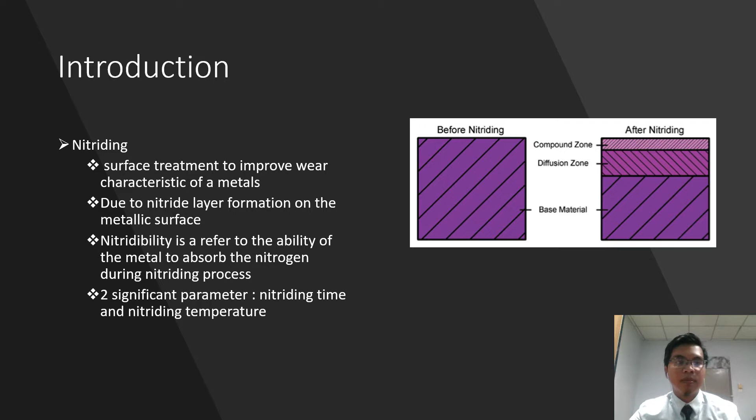There are three nitriding methods which are commonly used nowadays. Those three methods are gas nitriding, salt bath nitriding, and ion plasma nitriding, which is also known as ion bombardment nitriding. All these methods fall under the category of thermochemical processes of hardening the metal surface. However, the most suitable method for nitriding a magnesium alloy is gas nitriding.

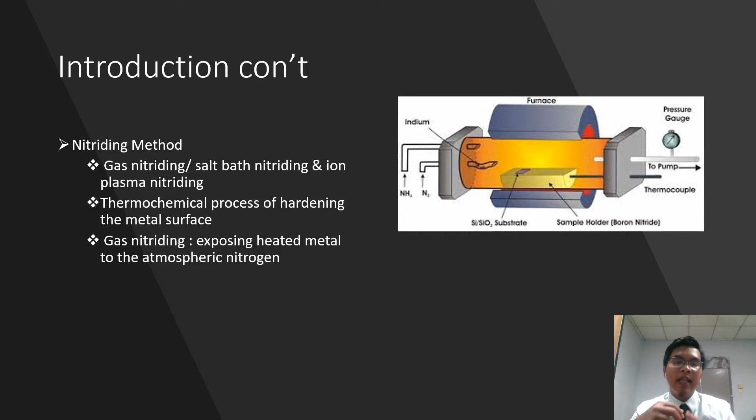Salt bath nitriding and ion plasma nitriding are not suitable because of the nitriding temperature. They require a higher nitriding temperature exceeding the melting point of a magnesium alloy. Therefore, the magnesium alloy will burn before the nitriding process ever occurs. So gas nitriding basically is exposing the heated metal to atmospheric nitrogen.

Magnesium alloy has been introduced into a variety of applications and fields such as automotive industries, electronics, and telecommunication. Magnesium alloy is also known for its excellent strength to weight ratio, where it is a lightweight metal but with higher strength.

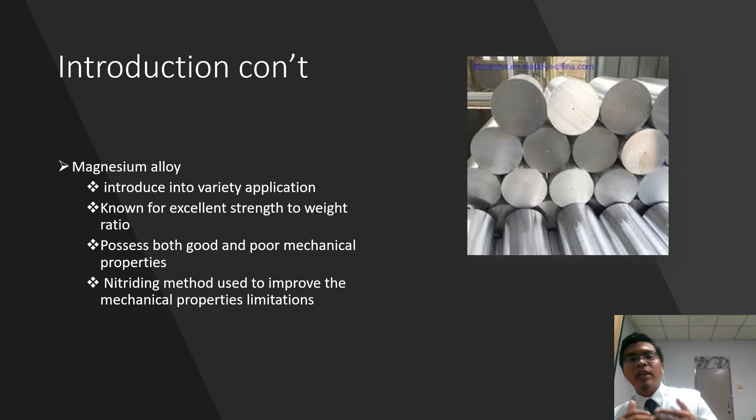It also possesses both good and poor mechanical properties. In terms of good properties, it has high dimensional stability, good machinability, good fatigue strength, excellent biocompatibility, and also a low density. However, in terms of poor properties, it has low surface hardness, low melting point, and low corrosion resistance. Therefore, a nitriding process is proposed to help improve the mechanical property limitations of the magnesium alloy.

The problem statement of the project is that magnesium alloy is a popular metal which has been introduced into industries. However, little study has been made on nitriding magnesium alloy, where most nitriding studies were made on carbon steel or titanium. Therefore, the best parameter setting for nitriding a magnesium alloy remains unknown.

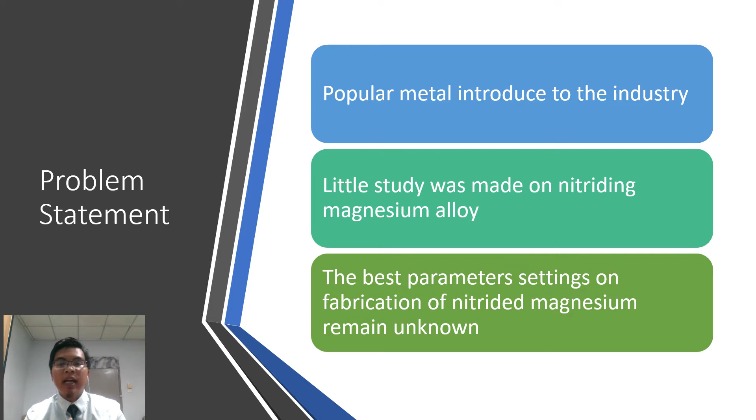Therefore, the objective of the project is to establish the correlation of the nitrided layer formation on the magnesium alloy with respect to the nitriding time. So here is the methodology of the project, which consists of dimensioning the sample, nitriding process, sample preparation, scanning electron microscope SEM imaging, X-ray diffractometer powder diffraction, and also hardness test.

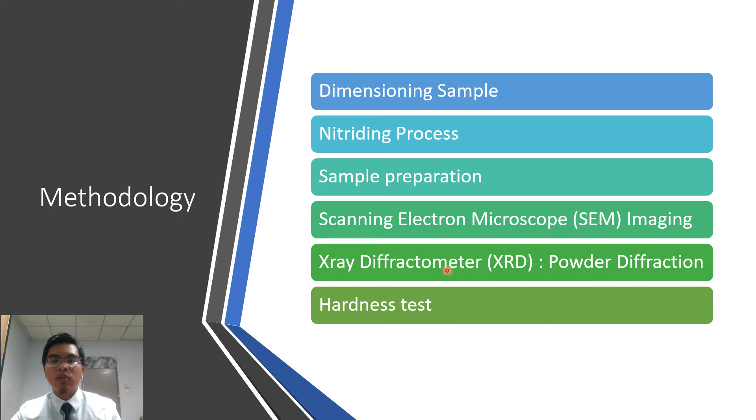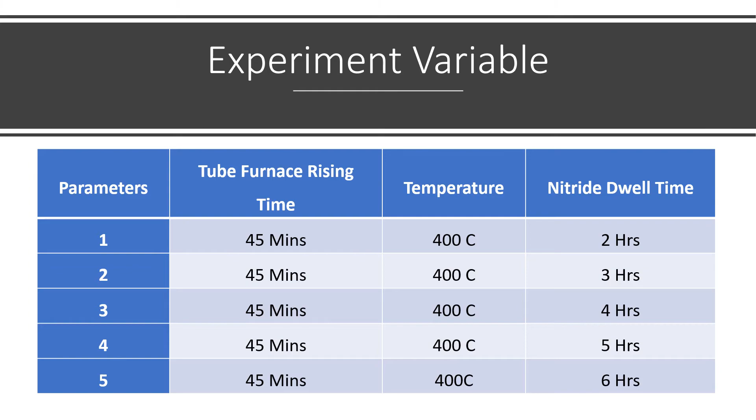Here are the 5 parameters used during the nitriding process. Every sample will have the same tube furnace rising time of 45 minutes at a constant temperature of 400. The difference for every sample is the nitriding dwell time, or the nitriding time, from 2 hours, 3 hours, 4 hours, 5 hours, and 6 hours. The results of the project will consist of microstructure, SEM imaging, XRD, and hardness test.

Here are the images of the microstructure for every sample. For the untreated sample, there is no layer formation between the phenolic powder and the magnesium itself. However, for the 2 hour and 3 hour nitriding, there is a visible layer between the phenolic powder and the magnesium, which occurs in this area for 2 hours and this area for 3 hours.

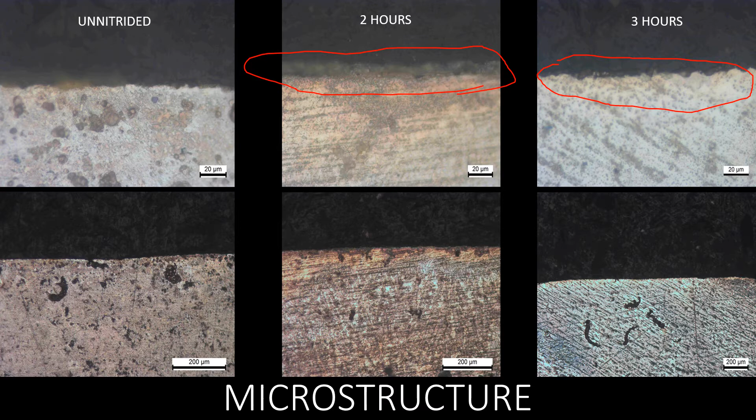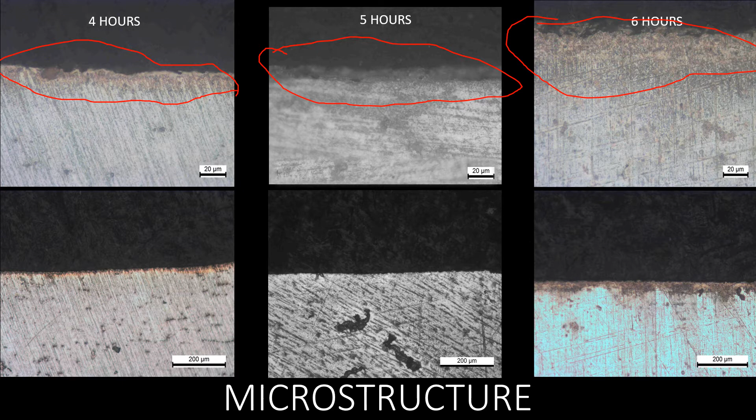As for the microstructure, it is basically to assess the quality of our sample preparation before going to the next step, which is SEM imaging. Here is the tabulated data of the SEM imaging and the depth layer formation.

For the 2 hours nitriding time, the average depth was measured at 2.6 micrometer, and it keeps increasing steadily up until 6 hours. As you can see, for the 3 hours, the average depth was 3.6 micrometer, for 4 hours the average will be 4.4 micrometer, 5 hours will be at the average of 4.93 micrometer, and for the 6 hours, which will be the highest average depth at 5.1 micrometer.

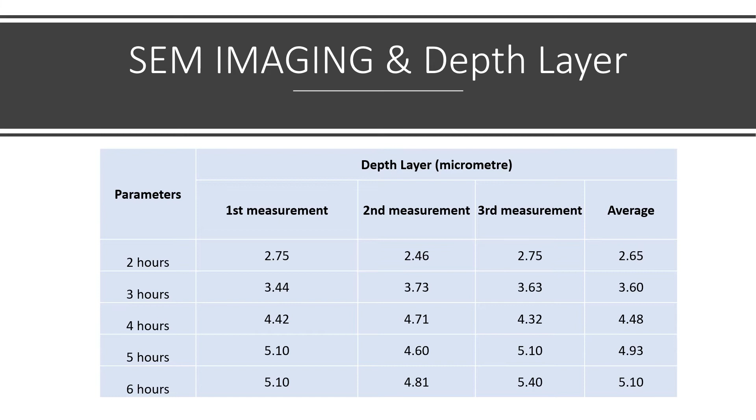Here is the line graph representing the tabulated data given just now. The orange line graph here represents the average value of the nitride depth layer. As you can see here, from 2 hours to 4 hours of nitriding time, the depth layer formation occurs at the same rate. However, after 4 hours of nitriding, it becomes a little bit slower, and after 5 hours, it becomes slower than the previous one.

This nitriding depth layer formation rate can be represented in terms of gradient value. As you can see here, 2 to 3 hours and 3 to 4 hours have the gradient value 0.95 and 0.88, which are close values. However, for the 4 hour to 5 hour of nitriding time, the gradient is 0.5, which is almost half of the previous one, which shows that the nitride depth layer formation is half as slow compared to the previous one.

And from 5 to 6 hours, the gradient value is 0.17, which is almost one third of the previous value, 0.45. This shows that after 5 hours of nitriding time, the depth layer formation becomes the slowest compared to all the parameters set in this project.

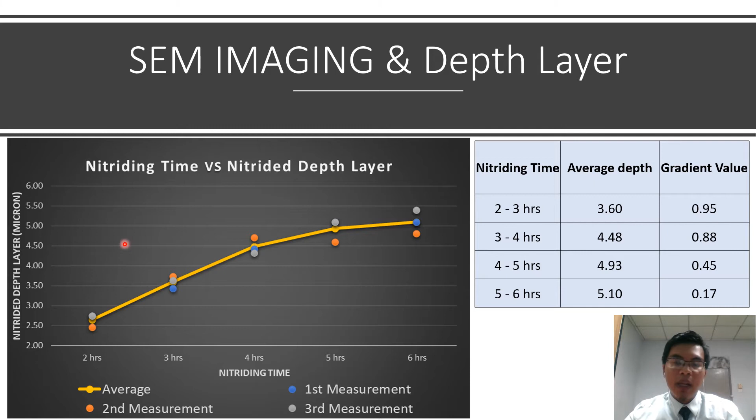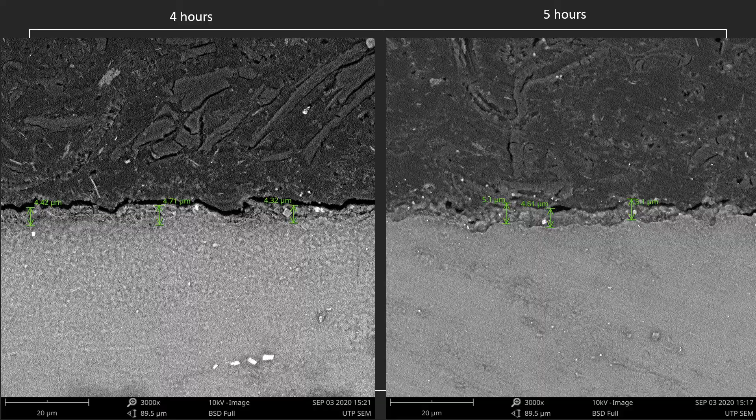As for 4 hours nitriding time, here is the nitride depth layer, which is recorded around 4.4, 4.7, and 4.3 micrometer. And here is the 5 hour nitriding time, where the nitride layer recorded around 5.1, 4.6, and 5.1, which has less significant difference compared to from 3 hours to 4 hours of nitriding time.

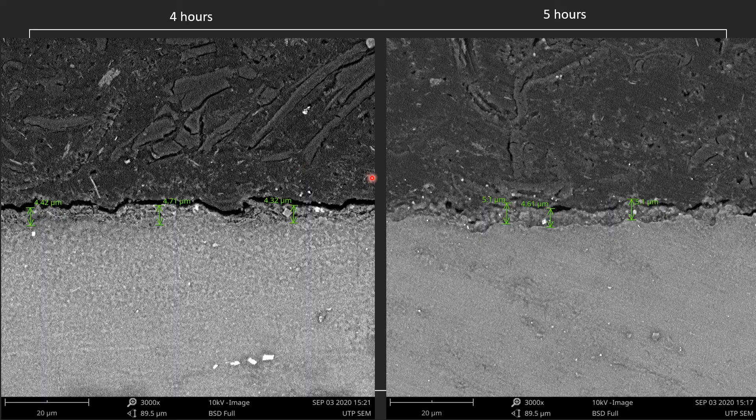So now we'll be focusing on the XRD result. Unfortunately, no data can be gained since the slot for XRD has been fully booked. This is because of the time constraint we face due to COVID-19. FYP students were allowed to return to UTP to do their experiments after week 6, which is in the middle of the semester. So that left me around another 6 to 8 weeks for experiments.

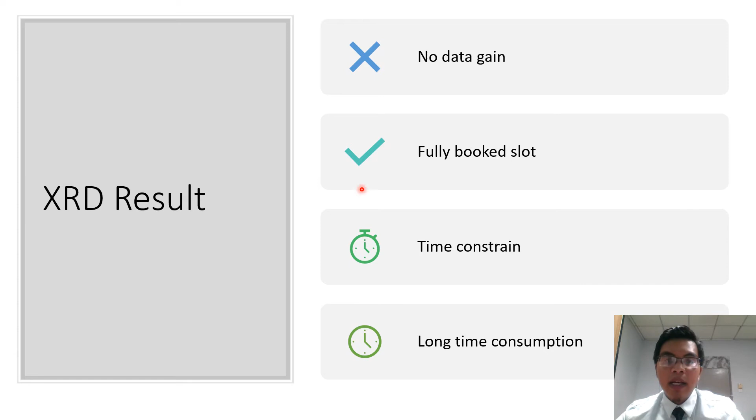Not only that, to make it worse, the nitriding process took 1 day for one parameter. I have 5 parameters, which means that I have 1 week allocated just for nitriding before progressing with another step. So therefore, with the limited time and the long time consumption, I am unable to gain the XRD result.

Now we will proceed with the hardness test. Unfortunately, no result can be gained. This is because of equipment failure. For your information, UTP has a Vickers testing machine and a Rockwell testing machine. However, the Vickers is currently offline because of damage done by a previous student.

The Rockwell is in great shape, but the issue I'm facing is that it has the improper indenter. The suitable indenter for magnesium alloy is scale A, B, and E. However, for scale B, due to the sample thickness of 0.4 centimeter, scale B produces a negative value in the hardness test, which is invalid. Therefore, no result can be gained for the hardness test.

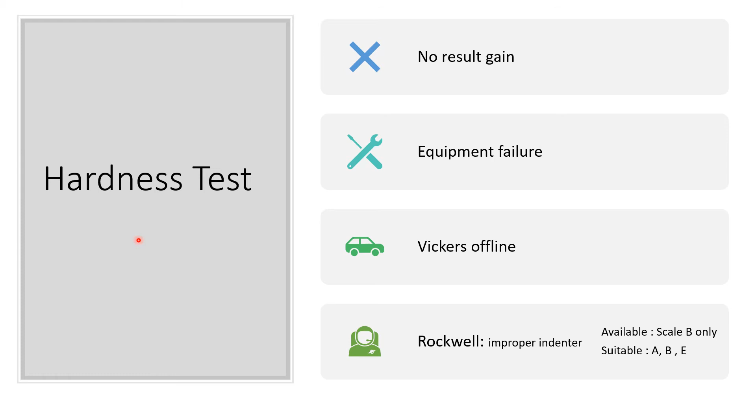So the discussion for the result is that the trend for nitrided depth layer becomes plateau after 4 to 5 hours of nitriding time. This indicates that there is a lesser reaction between the magnesium and nitrogen after 4 to 5 hours of nitriding time compared to the nitriding time before 4 hours.

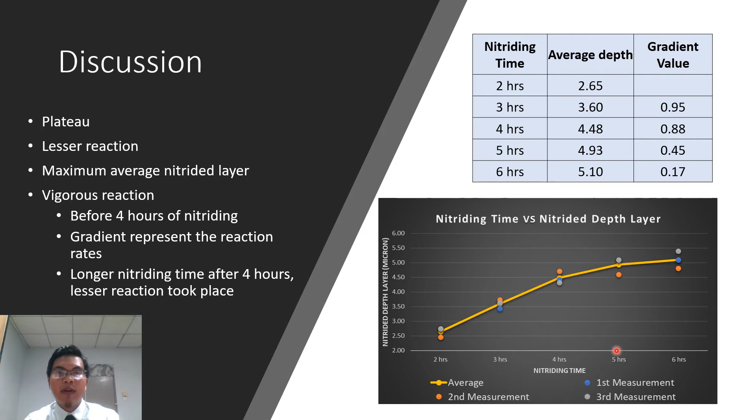So it is expected the maximum average nitrided layer is around 4 to 6 micrometer. This shows that the nitridability of magnesium is around 4 to 6 micrometer for every layer. So before 4 hours of nitriding time, the reaction between the magnesium and the nitrogen becomes vigorous. So the gradient can also represent the reaction rate between the magnesium and nitrogen.

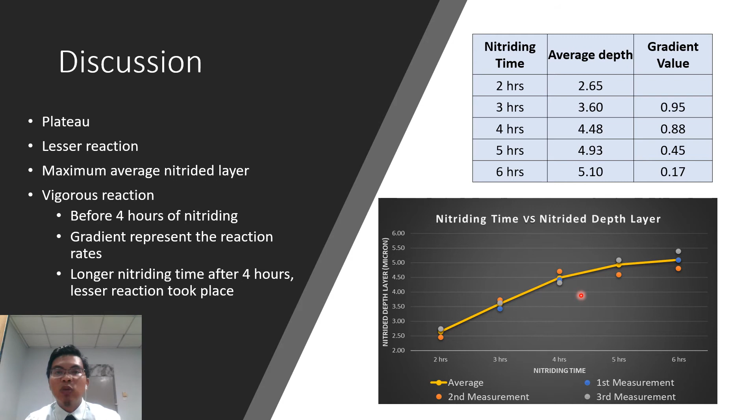So based on the trend, we can easily say that the longer the nitriding time, the deeper the nitrided depth formation. However, after 4 to 5 hours of nitriding time, the reaction between the magnesium and nitrogen becomes lesser and lesser. So the plateau is expected to be around 7 to 10 hours of nitriding time. After that, there is no reaction taking place between the magnesium and nitrogen.

So as you can see here, the nitrided depth layer formation trend from this graph can show us the best and the optimum nitriding time for the fabrication from the industrial perspective. For this setting, the optimal nitriding time is around 2 to 4 hours only. However, if the design requires the nitrided layer to be more than 5 micrometer up to 7 micrometer, it is advisable to prolong the nitriding time.

However, if the design requires the nitrided layer depth to be around 10 micrometer, with the current knowledge and findings, it's hard to see that the magnesium can achieve that layer. Basically, with the current knowledge, I can say it's impossible to reach a 10 micron layer because of the trending.

Because after 4 hours, the trend will start to plateau, and the plateau becomes significant after 5 hours, where the value of the gradient is around 0.17, and it's expected that after 6 hours, the value of the gradient is around 0.0 something. So it's very, very low and very, very inefficient from an industrial perspective.

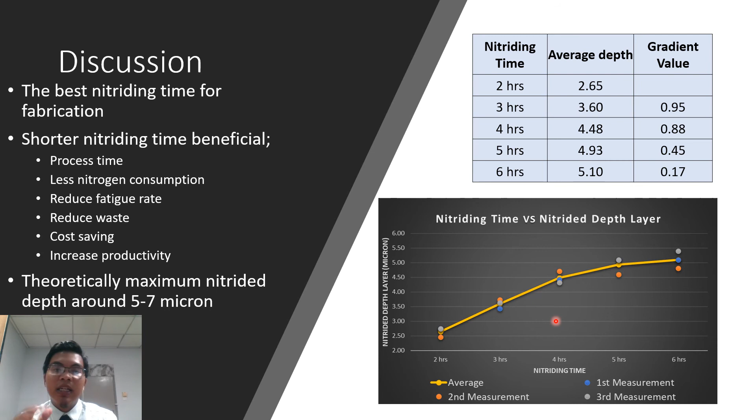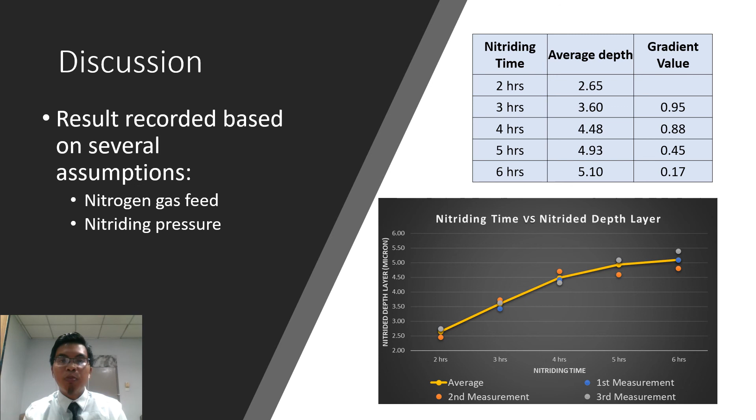It's highlighted that the recorded result is based on several assumptions. First of all is nitrogen gas feed, and secondly is nitriding pressure. The nitrogen gas feed cannot be quantified in this project during the nitriding process because of the limitation of the nitriding equipment. Nitriding pressure also cannot be quantified and cannot be controlled due to the limitation of the equipment itself. It doesn't have the proper equipment to measure and control both of these parameters.

There are a lot of limitations when I was doing this project. First of all is time constraint, due to COVID-19 and the new norm inside UTP. Another thing to consider is equipment availability, including inefficient equipment such as the nitriding process, where it requires 1 day for 1 parameter of nitriding, even though the nitriding parameter only involves 2 hours. Another problem is equipment breakdown due to mismanagement from the previous student.

So the conclusion from this project is that nitriding depth formation of magnesium alloy became plateau after 4 hours of nitriding time. The nitriding layer becomes deeper as the nitriding time increases until a certain nitriding time of 8 to 10 hours. The theoretical maximum depth achievable for magnesium alloy is around 5 to 7 micron using the same setting and parameters given in this project. The recorded data took place in a specific location and can hardly represent the overall sample.